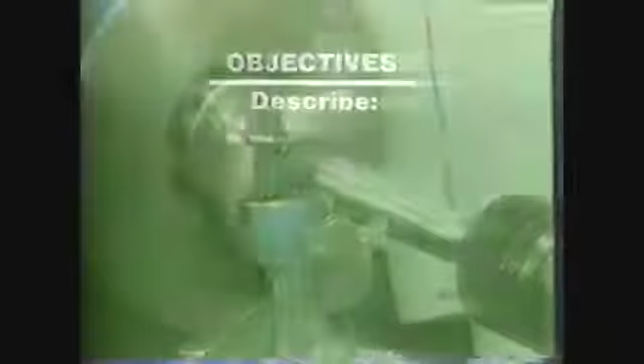After viewing this tape, you should be able to describe the safety procedures for machining tapers on the lathe, list different types of tapers and their common uses, calculate inches of taper per foot and degrees of taper, and describe the procedures for machining tapers by the offset tailstock, compound rest, and taper attachment methods.

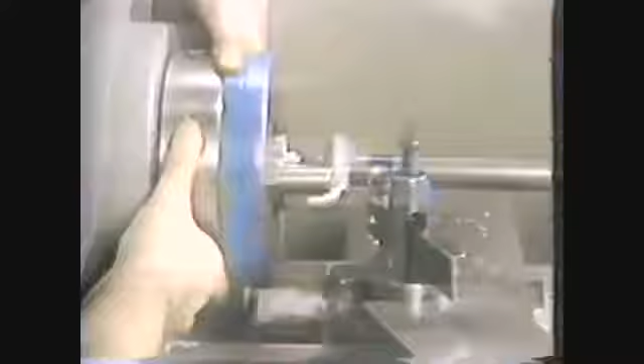Before beginning, perform the required safety procedures by wearing safety glasses, removing jewelry, and keeping sleeves above the elbow. Always check the work setup for clearance before engaging the clutch.

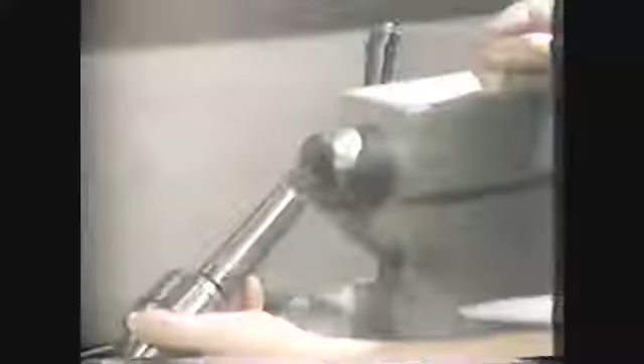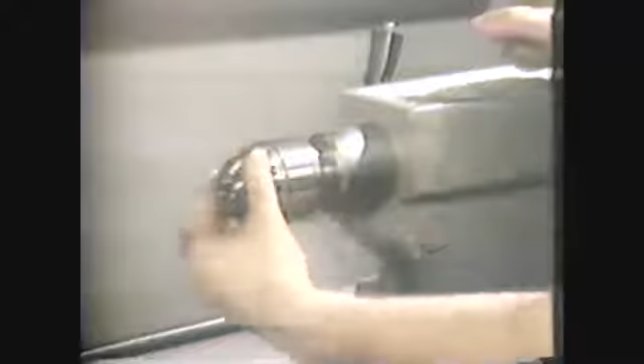There are generally 2 types of tapers: the self-holding tapers and the steep self-releasing tapers. The self-holding tapers generally do not exceed 2 or 3 degrees, so the shank of the tool is firmly seated in a matching socket. This match gives tremendous frictional resistance to slippage and may have a tang drive as well.

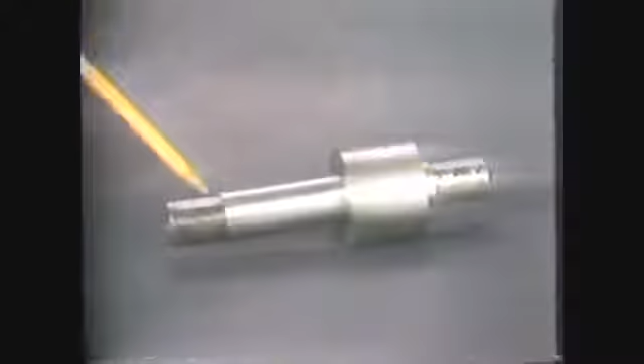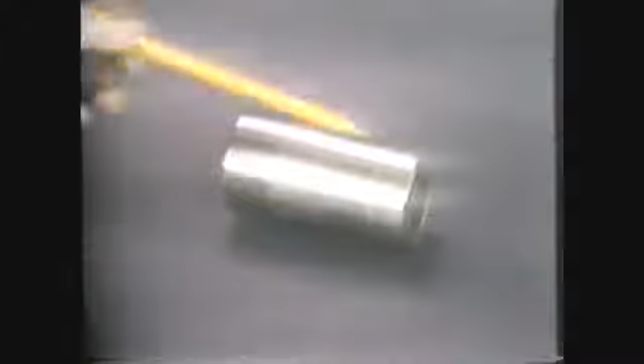Self-holding tapers on lathe mandrels have a taper of 1/2 thousandths to the inch. On Morse taper drill shanks, the taper is approximately 5/8 inch per foot. And on tools with a Brown and Sharpe taper, the taper is approximately 1/2 inch per foot. These self-holding tapers are used for arbors, collets, machine tool spindles, and for many other applications you can find in the Machinery's Handbook.

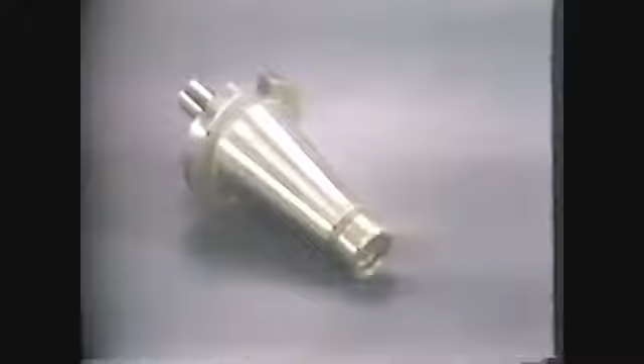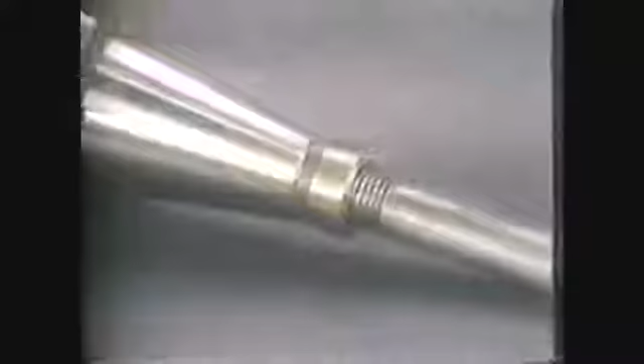The other kind of taper is the self-releasing or steep taper. These tapers usually exceed 16 degrees and require a positive locking device to prevent slipping. These tapers release very easily and are generally used on machine arbors. There is an American Standard Steep Machine Taper series which is charted in the Machinery's Handbook.

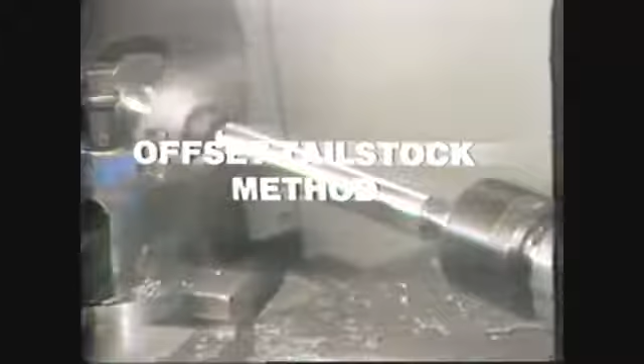The offset tailstock method is frequently used to turn long, slow tapers. When the tailstock center is offset by moving the tailstock out of alignment, the center line of the work and the line of travel of the turning tool are no longer parallel, and a taper will be turned on the work.

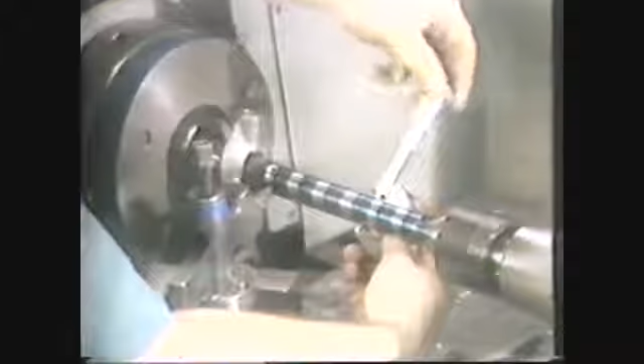To calculate the amount of offset for the tailstock, you determine the amount of taper per inch to be machined. The specification on this operation is 5 thousandths of taper per inch on a workpiece 8 inches long and 1 inch in diameter. We will machine the taper to a length of 6 inches with a diameter of 875 thousandths, 1 1/4 inches in from the end of the work.

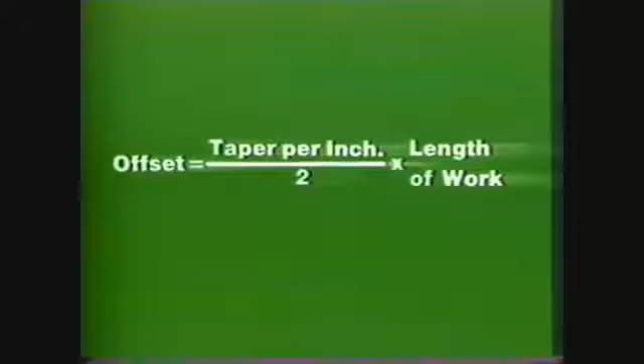Using the formula, tailstock offset equals taper per inch divided by 2 times the length of the work, and you get an offset of 20 thousandths. Place the 8-inch workpiece in the machine for turning between centers. Set up a dial indicator on the tailstock end of the work.

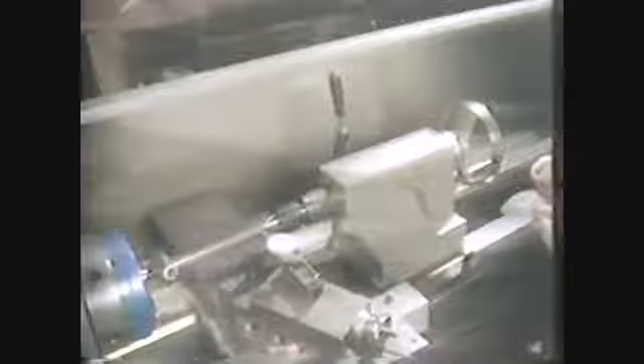If the work has a smooth surface, run the indicator along its length to check for taper. This piece has no taper, so we are ready to offset the tailstock 20 thousandths. Move the dial indicator to the tailstock end of the work. Set it to 0. Loosen the tailstock clamp and turn the adjusting screws to move the tailstock center 20 thousandths.

Lock the tailstock and check the spindle for adjustments. When work of a different length is placed between centers, a new offset will be required to cut the same taper per inch. Remove the indicator. Now set up the tool post.

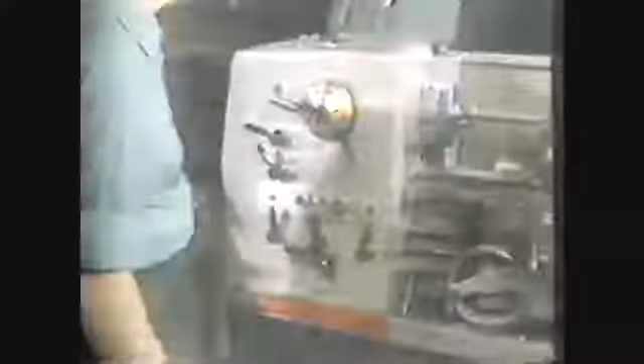In this case, we will use a right-hand finishing tool in a left-hand holder. The finishing tool will give us a smooth finish and allow accurate checking of the taper per inch. Set the tool precisely at center height or you will not cut accurate tapers. Set the spindle RPM for finishing, and set the feed rate to finishing feed.

Engage the clutch and blue the work about 6 inches from the end. Set your hermaphrodite calipers to 6 inches and lay off the length of the taper.

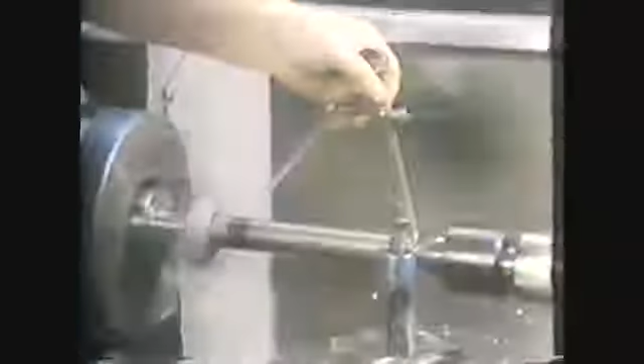Pick up the cut on the end of the piece and take a 30 thousandths depth of cut. This will remove 60 thousandths from the diameter of the work. Remember, the work has a 1-inch diameter, and the finished specification is 875 thousandths with the taper. Complete the cut to the 6-inch mark.

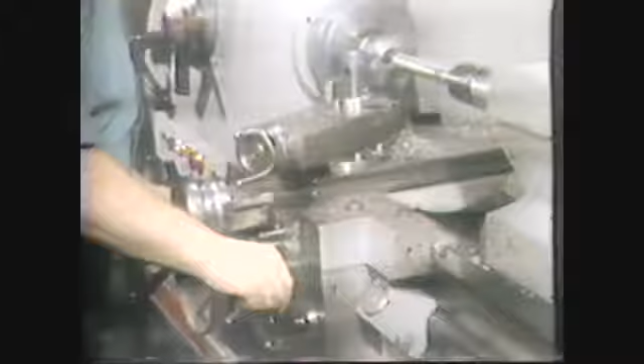When you get close to the mark, disengage the power feed and feed the tool by hand to the mark. Do not remove the tool from the work. Blue the work approximately 3/8 inch from the tailstock end. Then blue it every inch or so along the length of the taper.

Set the calipers and mark the work at 1/4 inch, 1 1/4 inches, 2 1/4 inches, 3 1/4 inches, and 4 1/4 inches. Then, disengage the clutch.

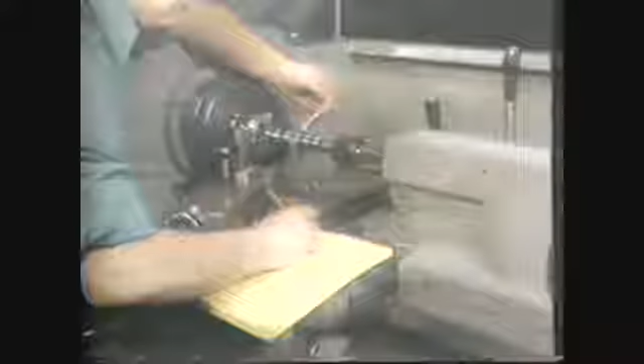Using the outside micrometer, start at the 4 1/4 inch mark and measure the diameter. Write it down. Measure the 3 1/4 inch mark and subtract that reading from the previous reading. Continue this way until you have measured and subtracted all the diameters. These readings all show a difference of 5 thousandths, so we are on our specification of 5 thousandths per inch of taper.

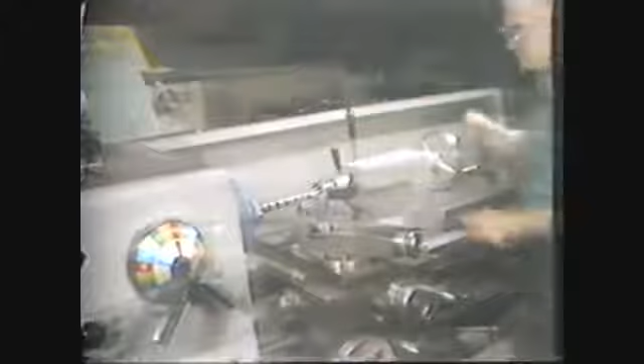If the readings do not meet these specifications, unclamp the tailstock and use the adjusting screws to correct the amount of taper. Take another cut and measure every inch to check the taper until you meet the specification.

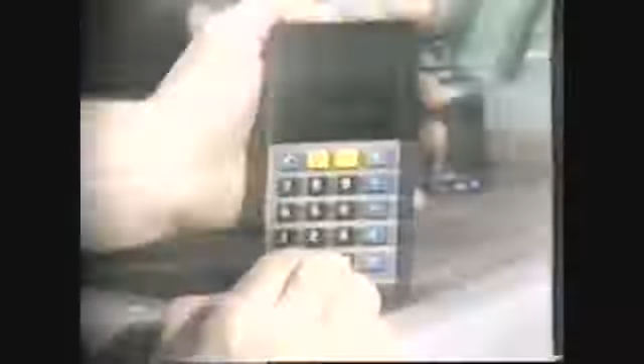Since this piece has the proper taper, we are ready to finish it to the specified diameter of 875 thousandths. The micrometer reading at the 1 1/4 inch mark is 936 thousandths. By subtracting 875 thousandths, you get a figure of 61 thousandths to be removed from the diameter.

Now you use the carriage hand wheel to move the tool to the end of the work. Do not move the crossfeed away from the work. When the tool bit clears, feed the tool in to remove 61 thousandths from the diameter. Engage the clutch and longitudinal feed and turn the work to the 6-inch mark. Use the carriage hand wheel for the last part of the cut.

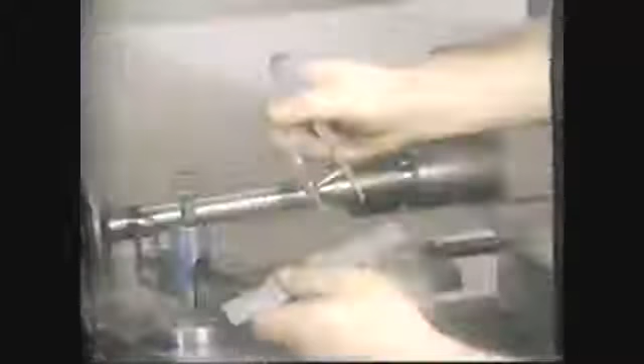Blue the work 1 1/4 inches from the end. Set the calipers and mark 1 1/4 inches from the end. Disengage the clutch. Measure the diameter. This diameter measures 876 thousandths, so it is within tolerance. This completes the turning of a taper with the offset tailstock method.

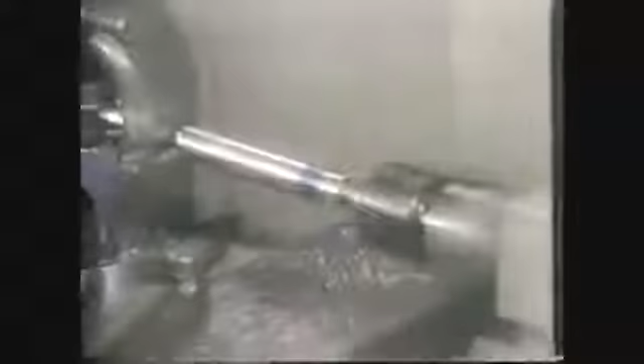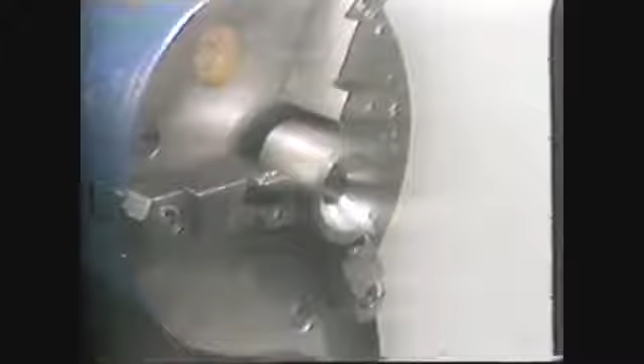The compound rest is generally used for cutting short, steep tapers, since its lead screw has limited travel. The work is usually held in a chuck for these steep tapers. The compound rest can be used for internal as well as external taper turning. For this demonstration, we will cut an 82-degree included angle on the end of a workpiece, leaving a 1/4 inch flat diameter on the end of the work.

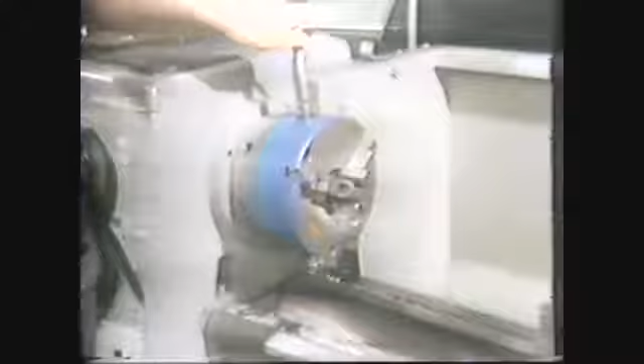Set up the piece in a chuck, leaving enough material extended to cut the angle, about 1.5 inches. Face the end square and blue it. The bluing will help with measuring the 1/4 inch flat diameter. The compound is always set to cut 1/2 the included angle. So 82 degrees divided by 2 equals 41 degrees. So the compound setting will be 41 degrees off the machine's axis.

Turn the compound parallel to the machine's axis. Then move it to 41 degrees. Lining up to a reference point and then making the setting will eliminate mistakes. Now, lock the compound in place. Set up the tool post with a right-hand finishing tool in a left-hand tool holder. This machining is the same as straight turning. Set the tool point at center height.

Set the spindle RPM for finishing. Check the compound travel to make sure it is adequate. About the center of the lead screw is a good place to start. Engage the clutch. Pick up the corner of the work with the tool point. Using the compound travel, move the tool to the end of the work and take a depth of cut with the cross feed. Now take the cut as you would in straight turning, feeding the tool by hand with the compound hand wheel.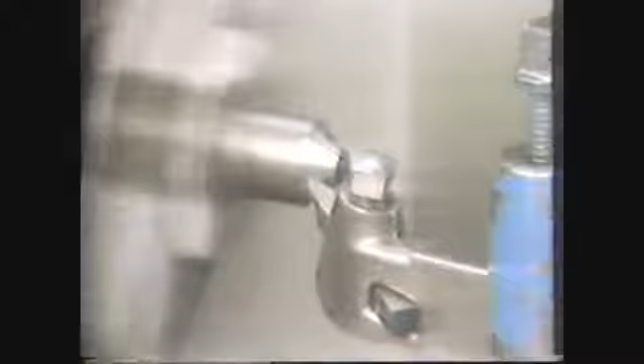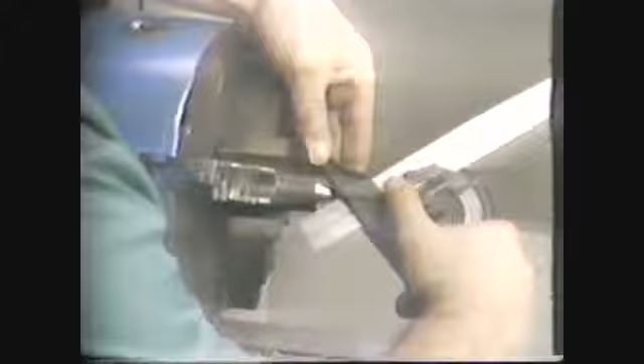Repeat the cut, taking 30 thousandths to 50 thousandths with each pass. Continue until there is about 1/2 inch of diameter on the end of the work. Disengage the clutch and move the tool away from the work. Using a protractor head and ruler, measure the included angle. If you have difficulty measuring the included angle, use any of the other angles to check it. We will use the end of the work.

The angle is 41 degrees off the axis, which would leave 49 degrees off the perpendicular or face. Set the protractor to 49 degrees and check the angle. This angle checks okay, so we are ready to machine it to size. Engage the clutch and machine the piece until you reach the specified 1/4 inch diameter on the end of the work. You can stop the work occasionally to check this diameter with a 6-inch rule.

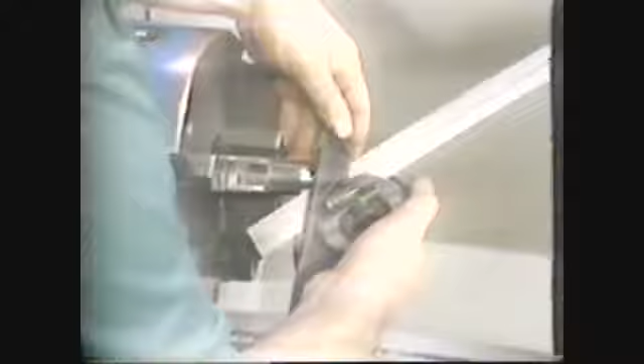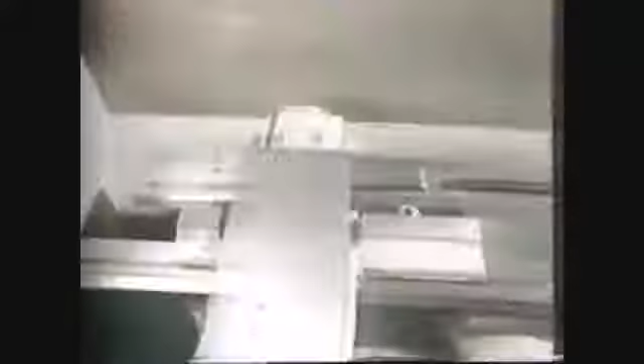This diameter is 1/4 inch, and the angle is 41 degrees, giving us an included angle of 82 degrees. This same procedure can be used for machining internal tapers by drilling a hole to the taper depth and using a boring bar for the cutting tool. The third method of machining tapers is with the taper attachment.

The taper attachment is used for machining both internal and external tapers. It has a good deal more travel than the compound, but the angle it can cut is limited. The taper attachment method is more desirable than the offset tailstock method because the lathe centers stay in alignment and pieces of different lengths can be cut to the same taper without changing the setting.

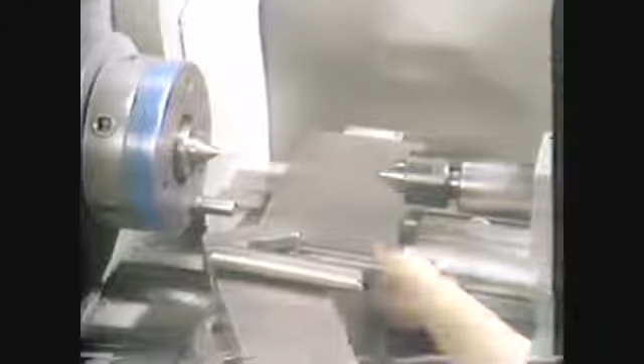Prepare a workpiece with a diameter of 1 inch and a length of 6 1/4 inches for turning between centers. Select a finishing speed and feed rate. Set up a right-hand finishing tool in a left-hand tool holder for straight turning.

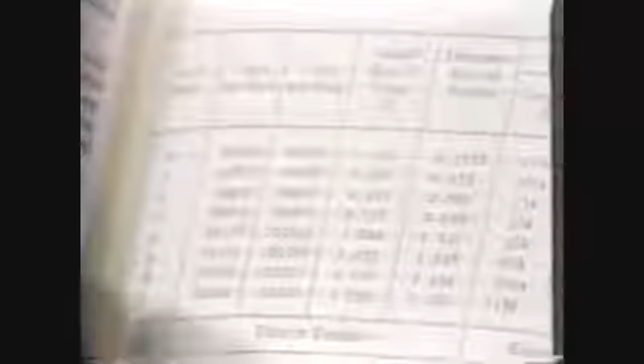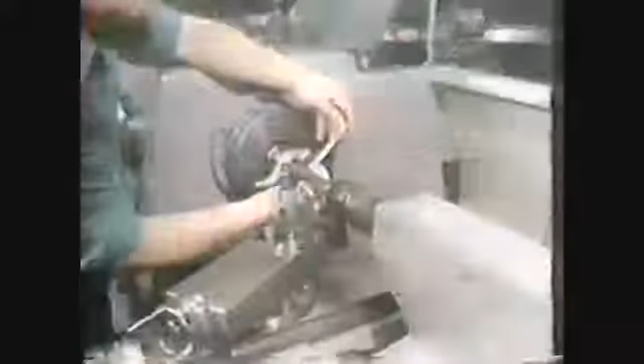The part to be machined is a number 3 Morse taper plug gauge, the dimensions of which are found in the Machinery's Handbook. The small diameter is 0.778 inch, and the tapered body length is 3 7/16 inches. From the table, you can see that a number 3 Morse taper has 0.050 inch of taper per inch. So the length of the taper times taper per inch plus the small diameter of 0.778 equals the large diameter of 0.941 inch. The workpiece diameter of 1 inch is therefore adequate.

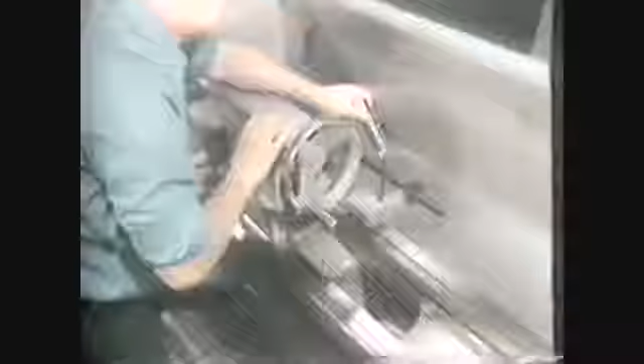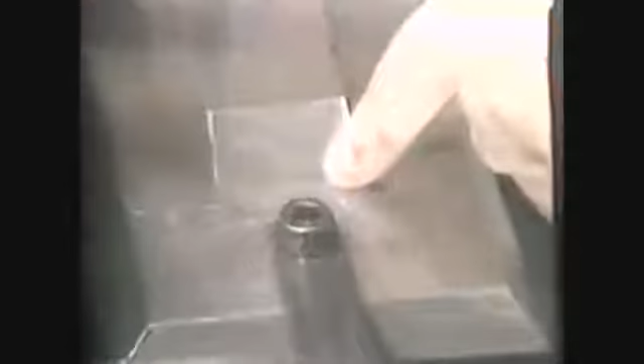Position the taper attachment so the travel will be in the center of the taper attachment guide bar. Tighten the locking bolts on the clamp. The taper attachment will now feed the tool parallel to the guide bar. Loosen the locking bolts and set the attachment to 0.600. The taper attachment is graduated in 1/16 of an inch, so the setting will be just under 5/8 inch. Lock the locking bolts.

Engage the clutch. Pick up a cut on the work. Then move the tool toward the tailstock as far as you can without touching the center. This procedure takes the backlash out of the taper attachment and prevents a straight length at the beginning of the taper. Take a 0.050 depth of cut and engage the longitudinal feed. Continue the cut until the tool leaves the work at the headstock end.

Stop the machine. Return the tool to the tailstock end. A taper attachment has backlash, so you have to stop the machine to keep from cutting the work as you return the tool for another cut. Engage the clutch.

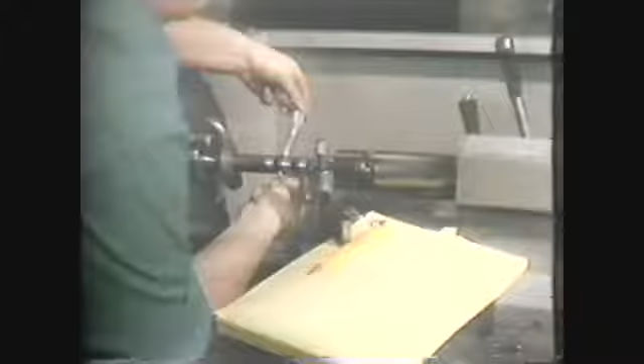Blue the machined surface 1/4 inch in from the end, 1 1/4 inches from the end, and 2 1/4 inches from the end if you have enough machined length. Using hermaphrodite calipers, mark the workpiece at 1/4 inch from the end, 1 1/4 inches, and 2 1/4 inches. Measure the diameter and subtract to determine the taper per inch. If the taper is within tolerance, machine the part to size. This piece measures 0.048 inch of taper per inch, which will require adjustment of the taper attachment.

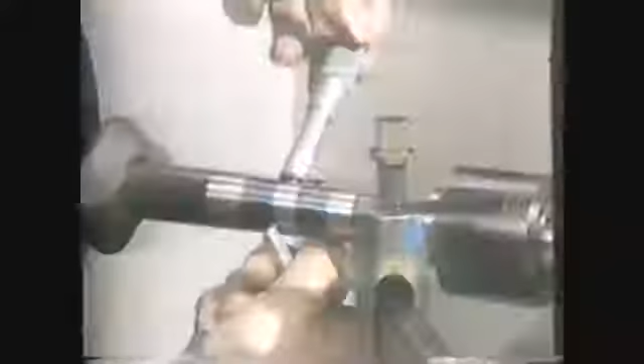Loosen the locking bolts and adjust the guide bar, taking care to move it in the right direction. You can hold your hand over the guide bar to detect the direction of movement for fine adjustments. Lock the locking bolts. Now, take another cut. Mark the diameter every inch, beginning 1/4 inch from the end of the work. Measure for taper per inch. This time the reading is 0.050 taper per inch, so we are ready to machine the small diameter to size.

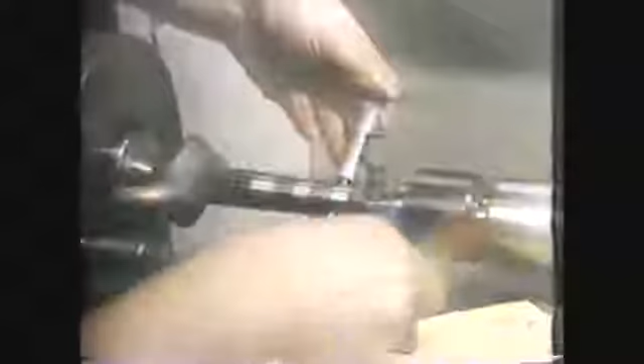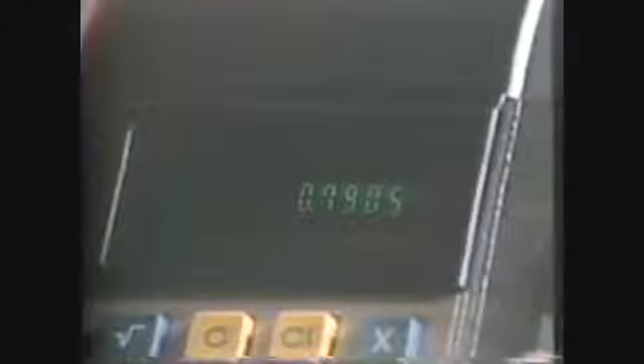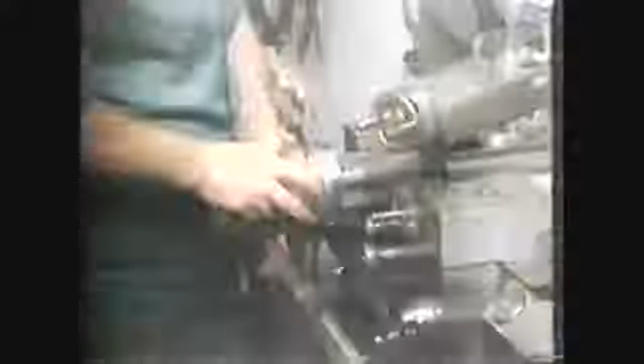The diameter will have to be measured 1/4 inch from the end, since you cannot measure directly on the end. Divide 0.050 by 4 to determine the amount of taper in 1/4 inch. This comes to 0.0125. Add 0.0125 to 0.778 and the diameter 1/4 inch from the end should be 0.790. The diameter at the 1/4 inch mark is 0.820, so you have 0.030 to remove from the diameter. Set the depth of cut and take your final cut.

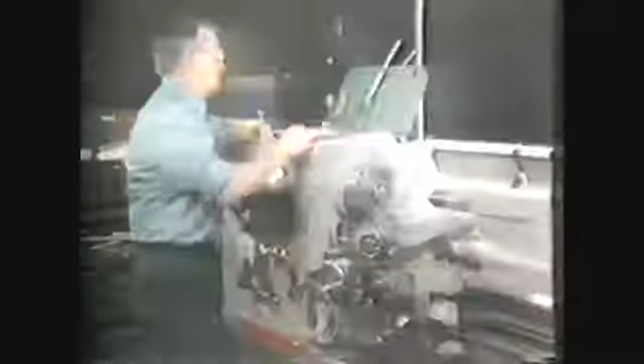When the diameter is finished, disengage the clutch. Move the tool out of the way and remove the work from the machine. Check the work for size using the outside micrometer. This piece measures 0.791, which is within tolerance. If the piece does not meet size specifications, replace it between centers and finish it to size.

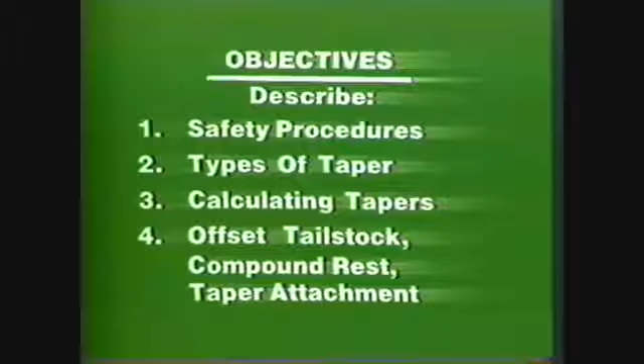To review briefly, you should now be able to describe the safety procedures for machining tapers on the lathe, list different types of tapers and their common uses, calculate inches of taper per foot and degrees for machining tapers, and describe the procedures for machining tapers by the offset tailstock, compound rest, and taper attachment methods. You have now been introduced to the basics of turning tapers on a lathe.